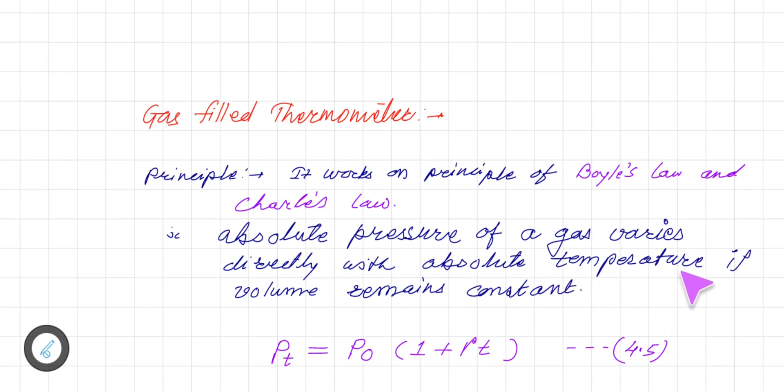According to Charles' law, the absolute pressure of a gas varies directly with absolute temperature if volume remains constant. That means when we consider any container in which the gas is filled, and we keep the volume constant, if we increase the temperature of this body, then inside pressure will increase. So as temperature increases, the pressure will increase, but the volume remains constant. This is the basic principle of these kinds of thermometers.

So the relation between pressure at temperature T and pressure at 0 degree Celsius is given by Pt equals P0 into 1 plus gamma T, where Pt is the pressure at temperature T which is being measured with the help of the gas filled thermometer, and P0 is the pressure of the gas inside the container or thermometer at 0 degrees. Here T is again the temperature which is being measured.

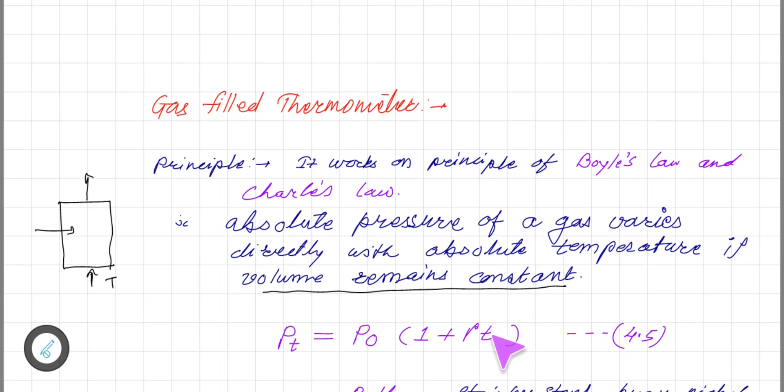Now we are talking about the construction of these gas filled thermometers. Here it is, you can see this is a hot body whose temperature is to be measured. Now here there is a bulb, generally made up of stainless steel, brass, or nickel. These kinds of metals are used for the construction of this bulb. Now this bulb is inserted in the system where temperature is to be measured, so obviously heat will be transferred from the hot body to the bulb.

This bulb contains an inert gas placed inside it, and the heat will be transferred from the system to the gas inside the bulb, and its temperature will increase. Similarly, to the bulb a capillary tube is connected through which the gas can pass to this Bourdon tube. So capillary tube of various lengths are used in these thermometers.

It depends on the application which we need it for, so it can be as long as 70 meters. When this capillary is used, generally the material used for the capillary tube is like copper, steel, etc., and the length is limited up to say 70 meters, and later on this capillary is connected to the Bourdon tube.

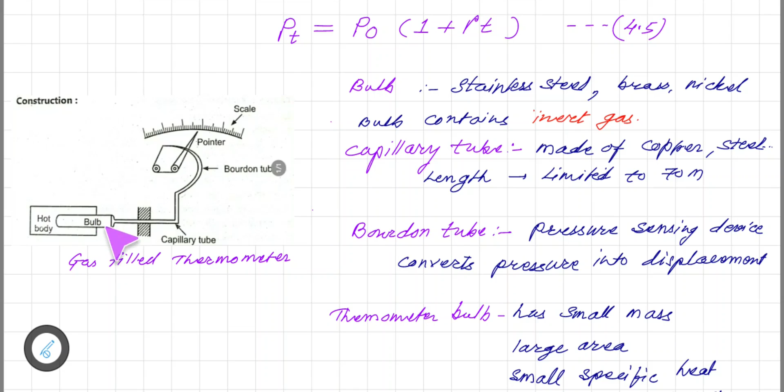Now one important thing is that the thermometer bulb has a very small mass, and it must have a large area so that maximum heat can be transferred from the system to the bulb instantly, giving a timely response. Similarly, it must have a small specific heat, meaning when heat is taken from the system, it should not utilize a large amount of heat such that the temperature of the system decreases. So it should have a small specific heat and it must have high thermal conductivity. These are the parameters of this bulb.

In short, this gas filled thermometer is kept in the system. The bulb comes in contact with the hot body which transfers heat from higher temperature to lower temperature. So the temperature of gas inside the bulb increases and that expands, and that is why pressure is exerted through this tube. It goes on the piston connected to the Bourdon tube, and this arrangement displaces the pointer on the scale. Basically this device is calibrated, so change in temperature and corresponding deflection of the pointer is noted, it is calibrated, and thereafter the scale is designed.

So here we saw that Pt is equal to P0 into 1 plus gamma T, where Pt is the pressure at temperature T degrees Celsius, which is to be measured at that instant.

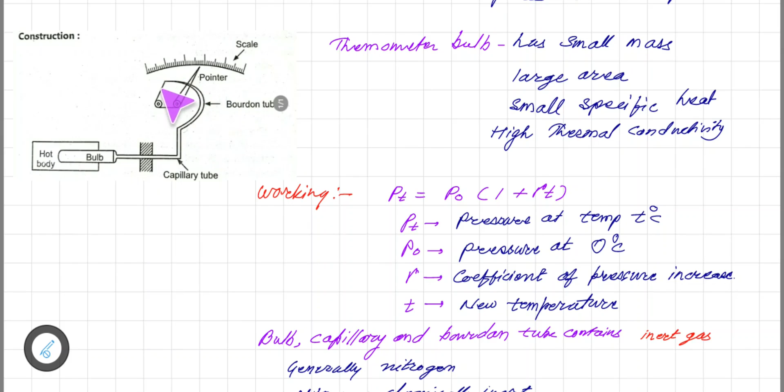P0 is pressure at 0 degrees Celsius, and gamma is the coefficient of pressure increase, meaning whatever the change in temperature, there is a corresponding change in pressure for that particular gas. The bulb, capillary, and Bourdon tube contain the inert gas. The moment temperature changes, the gas inside expands and exerts pressure on the piston, which forces the pointer to displace.

Generally nitrogen gas is used in this kind of system. The reason is nitrogen is a chemically inert gas, which is one important benefit. It also has a favorable coefficient of expansion for getting reliable readings, and it has a temperature range from minus 200 degree Fahrenheit to 800 degree Fahrenheit, so it can measure temperature between these two ranges.

Now what are the advantages of using this gas filled thermometer? It has a very fast response, meaning the moment the temperature of the system changes, the corresponding temperature is changed by the bulb and gas expands instantly.

It gives a very fast response as displacement of the piston. Second, the scale is linear, meaning if there is a linear change in temperature, at the same instant the pointer shows the deflection, either increasing or decreasing correspondingly on the scale.

Third, it has a rugged construction, with satisfactory response time, sensitivity and accuracy. The response time is very good, as well as the sensitivity and accuracy of the gas filled thermometer. These are the advantages, along with low cost and less maintenance.

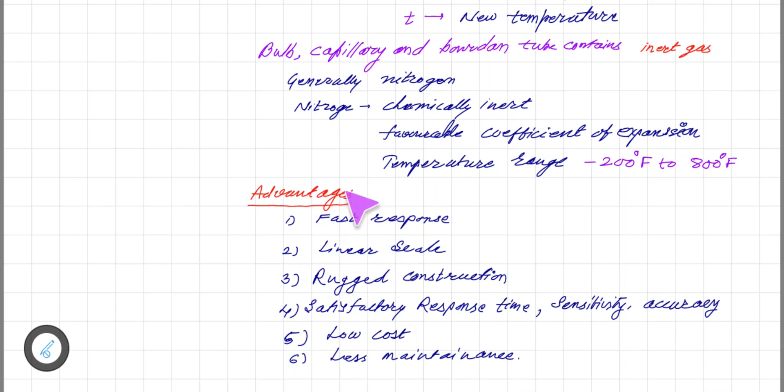Apart from this, it also has some disadvantages. For accuracy, it is necessary that the size of the bulb should be very large, and if it is small, then it hampers the accuracy. That is one disadvantage.

In case of failure of any part of the entire system, we need to replace the complete system. That is another disadvantage. Then there is a limited maximum temperature, so we cannot use it for very high temperature. It also has much lower accuracy, sensitivity and temperature span compared to other types of thermometers used for measuring temperature.

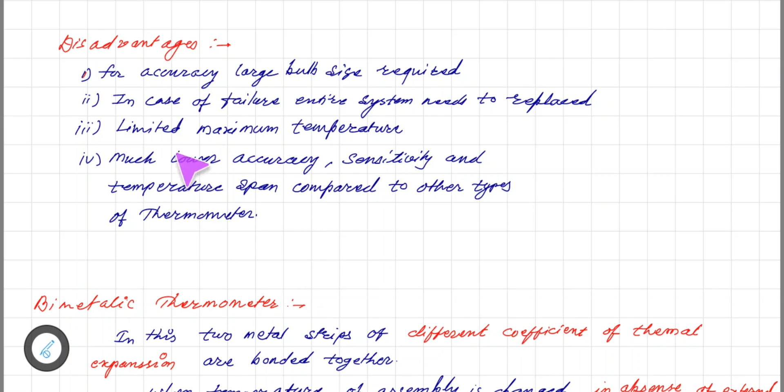Now, bimetallic thermometers. The name itself indicates that bimetallic means two metals are used. Different metals are used for construction of this kind of thermometer, because every metal has a different coefficient of expansion. So two metals with different coefficients of expansion are used, and at the same temperature their expansion will be different. That particular parameter is used for measurement of temperature, which is why it is called a bimetallic thermometer, and the coefficient of expansion of the metal plays an important role in its construction and working.

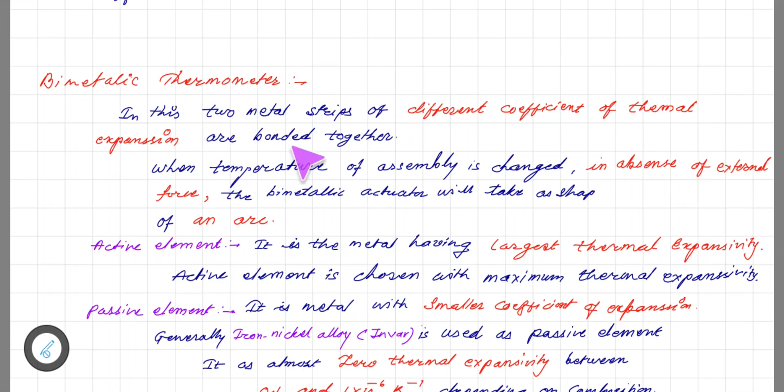Here, two metal strips of different coefficients of thermal expansion are bonded together. As shown, this is one metal and this is another metal, different metals with different coefficients of expansion, and they are bonded in such a fashion that they are completely in contact with one another and stick together.

There are two types of metals here: passive element and active element. Whenever the temperature of this strip changes, the expansion rate of one metal is different than the other—one expands less and the other more—and as they are tightly bound or fixed, a bending effect takes place. That bending gives us the change in temperature, so as temperature changes, the amount of bending of the metal tells us how to calibrate the device to measure temperature.

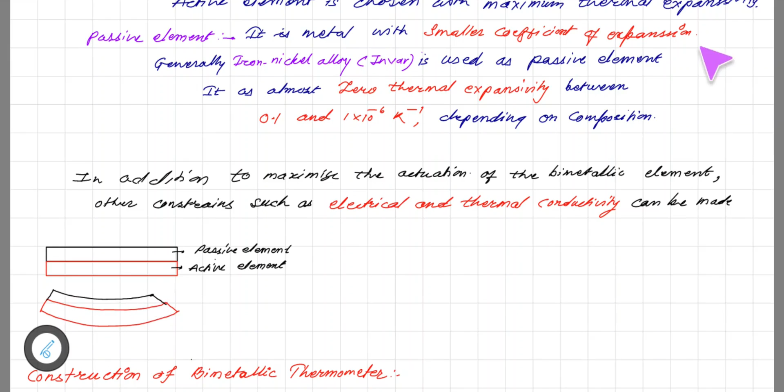When temperature of the assembly is changed, in absence of external force, the bimetallic actuator will take a shape of an arc. So as we saw, it bends and forms an arc.

In this, two different metals are used. One of them is called the active element, which is the metal having the largest thermal expansivity. The active element is chosen with maximum thermal expansivity, so that the change in temperature will cause a large expansion in that metal.

The other one is a passive element, a metal with smaller coefficient of expansion. Because there is a large expansion in one material and small expansion in the other, we can get a large bending and form a large angle of an arc.

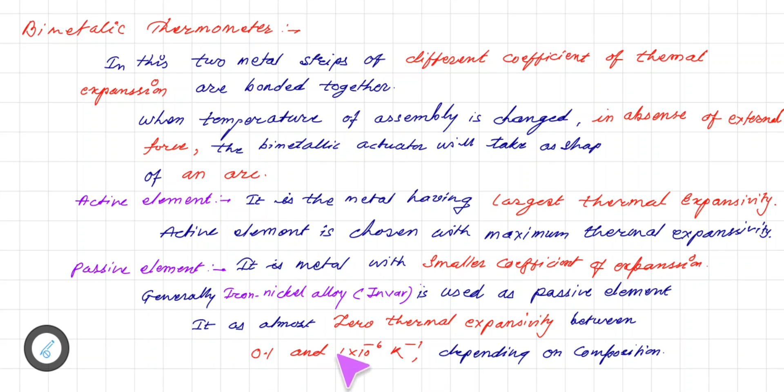Generally iron nickel alloy, that is Invar, is used as a passive element, since it needs a smaller coefficient of expansivity. It has almost zero thermal expansivity, between 0.1 and 1 into 10 raised to minus 6 per Kelvin, depending on the composition of material. If you change the composition, we can fine tune the expansivity of that particular material.

This bimetallic effect is nowadays used in numerous applications ranging from domestic appliances to compensation in satellites, etc. When we talk about bimetallic strip or bimetallic thermometer, the effect can be used in two ways: either as an actuator, or as a thermometer. Let's see what the actuator and thermometer effects are.

A bimetallic actuator consists of two metal strips fixed together, with different expansivity. As the temperature of the actuator changes, one element will expand more. Here the metal shown in red has high expansivity, so it expands more, whereas the black one expands less in comparison. Since both are fixed together, a bending effect takes place, which gives us a change in its plane due to change in temperature.

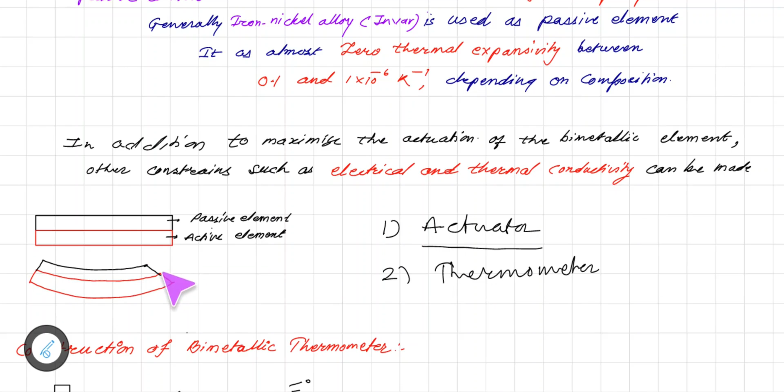Further, this bending can also be mechanically amplified if we need to produce a larger change, and hence the displacement can be easily measured.

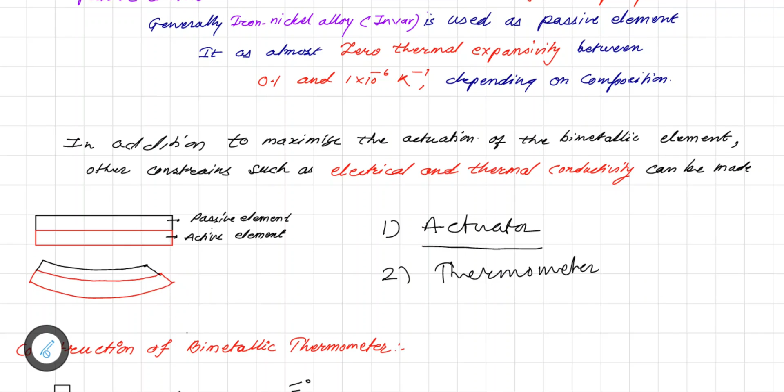Here is the construction of a bimetallic thermometer. These are two metal strips, say metal A and metal B, having different coefficients of expansion, fixed such that one end is fixed and the other end is free. When the temperature of this metal changes, due to different expansion coefficients, it will bend. As it bends, we can measure this angle, which is proportional to the change in temperature, and a system of pointer and scale is arranged.

As it bends, it will be indicated by the scale and pointer arrangement, and after calibration we can use it for measurement of temperature. This is the basic idea of a bimetallic thermometer.

In the construction of a bimetallic thermometer, the bimetallic strip is in the form of a cantilever. Whenever temperature changes, we get deflection, and that deflection is proportional to the length of the strip - a larger length gives a larger deflection. Deflection is also proportional to variation in temperature, so a larger variation in temperature gives larger deflection.

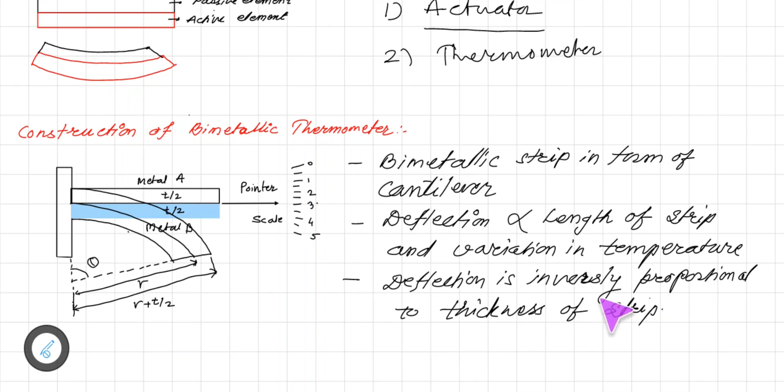As these two metals have different coefficients of thermal expansion, as there is a change in temperature, consider T2 minus T1, then both metals bend. That means the variation in temperature causes expansion in the strip, and this expansion causes the strip to move in a uniform circular arc, so the strip bends and forms an arc of a uniform circle.

Here we show the radius of that circle, of which the arc is a part, that radius is r. At this end the radius is r plus t by 2, and at the center the radius we are considering is r.

Now the radius which is formed, r, is given by the formula: 2 times t divided by 6 into alpha A minus alpha B into T2 minus T1. So T2 minus T1 is the change in temperature, t is the thickness of the strip, and alpha A and alpha B are the thermal coefficients of expansion of metal A and metal B.

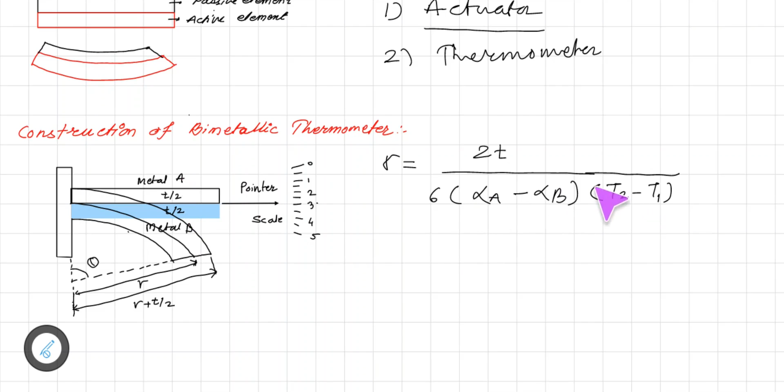Now we see this as a ratio, the expanded length of strip A. We have one strip, and another strip; here the radius is r, and here it is radius r plus t by 2. So r plus t by 2 upon r equals the expanded length of strip A divided by expanded length of strip B. That is given by L into 1 plus alpha A, the coefficient of expansion of metal A, into T2 minus T1, divided by L into 1 plus alpha B into T2 minus T1, where alpha B is the coefficient of expansion of strip B.

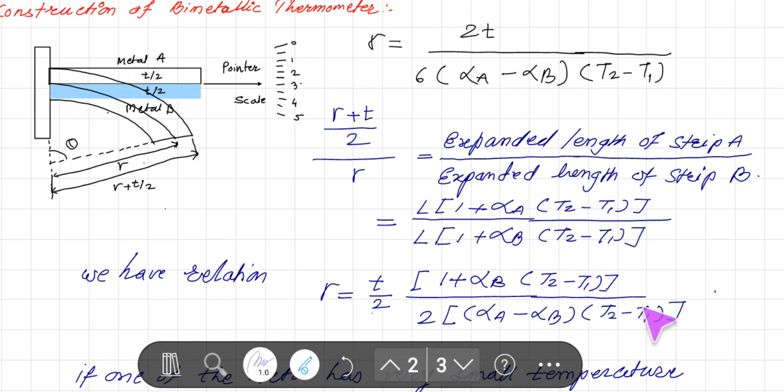So now we have the relation: R equals T upon 2 into 1 plus alpha B into T2 minus T1, divided by 2 times alpha A minus alpha B into T2 minus T1. Here we see this is the coefficient of expansion of one strip and that of another strip.

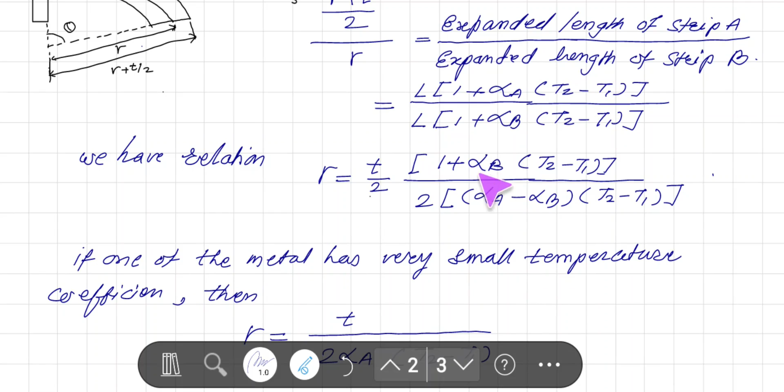If we consider one of the metals has a very small temperature coefficient, let alpha B be very small, then this term becomes negligible, and we get R equals T upon 2 into alpha A into T2 minus T1.

From this relation it is clear that if one end of the strip is fixed and there is a change in temperature, then the corresponding displacement is shown by this relation.

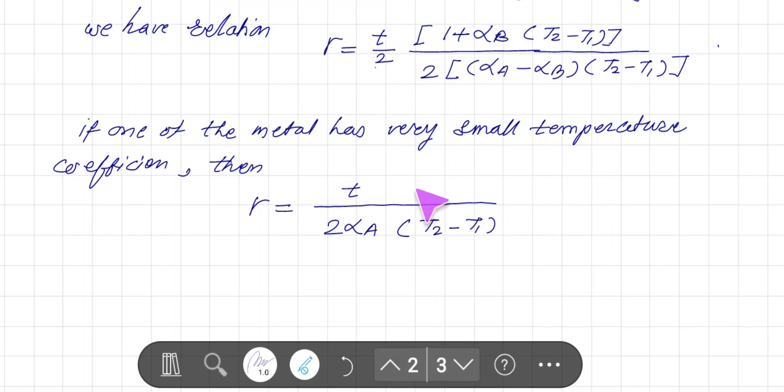Applications of bimetallic thermometers: this thermometer is normally used in various fields. In household appliances it is used in air conditioners, ovens, etc. Similarly, it has several industrial applications and is used there too.

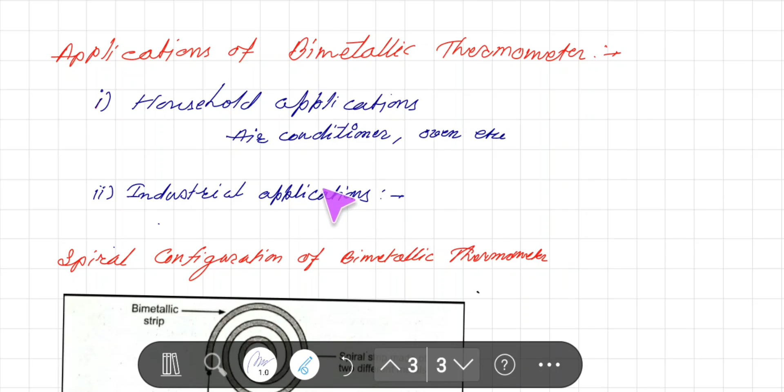Some configurations of bimetallic thermometers are shown here. As we saw, the thermometer is in the form of a bimetallic strip, but here, instead of a simple strip, a spiral strip is used. Upon changing temperature, since two dissimilar metals with different coefficients of expansion are there, the shape of this metallic spiral strip changes according to temperature, and the corresponding temperature is shown on the scale. This is one configuration of the bimetallic thermometer.

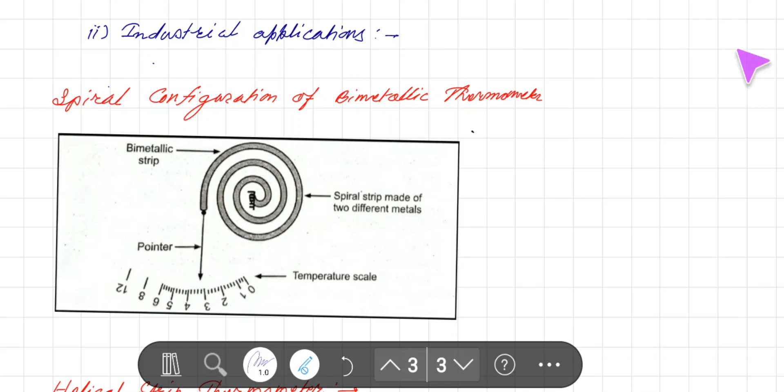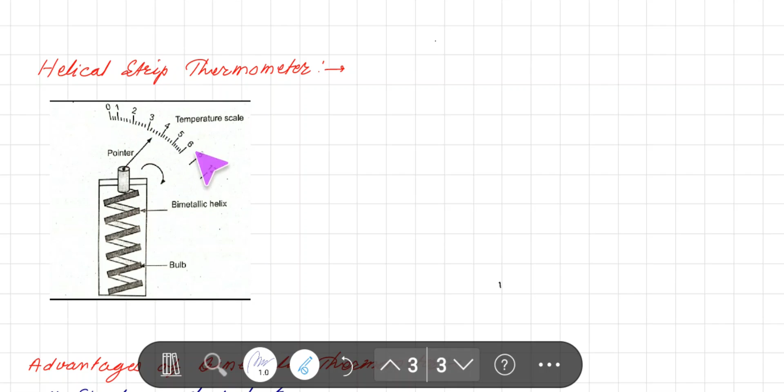Another configuration is the helical type, in which the shape of the strip is helical. Again, when the temperature changes, due to dissimilar metals with different coefficients of expansion, it twists, and that twist is connected to a scale and pointer arrangement, which shows the variation on the temperature scale corresponding to the change in temperature.

Advantages of bimetallic thermometers: they are simple and robust. Second, accuracy of this kind of thermometer is between plus or minus 2 to 5%. They can withstand 50% over the temperature range and can be used where mercury thermometers are used, so we can replace mercury thermometers with these. They also give a reliable reading.

But it has some limitations: it is not recommended above 400 degrees Celsius because accuracy decreases, and when used regularly, the strip may deform permanently, which may again create inaccuracy in the measuring system. These are the limitations of bimetallic thermometers. Okay, thank you very much.